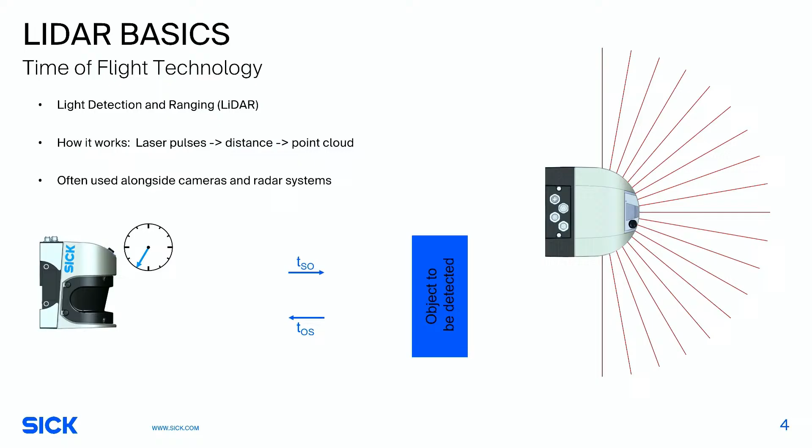So by combining all of these sensor systems together, again, if you can fuse all that data into one system, you often get the most reliable system overall. But LiDAR brings a lot to the table.

When you're talking about LiDAR sensors, there's usually kind of a trade-off between 2D versus 3D. 2D, just like on the slide I just showed, is just a single slice of the surroundings. So like we show here on the right, basically you have a single plane, and then if you have that plane mounted horizontally, you get a reading of everything that it can see in that level plane. If you mount it vertically, you're going to be more like an invisible wall, for example, so you get a vertical plane depending on how you orient that sensor.

3D LiDAR, on the other hand, usually adds some other functionality, whether it's a secondary mirror, a rotating hexagon mirror, or some prism effect, to basically get a 3D view of the surroundings. So multiple planes combined to get one 3D point cloud. Two different concepts, two different executions, but basically all based on that same LiDAR time of flight principle.

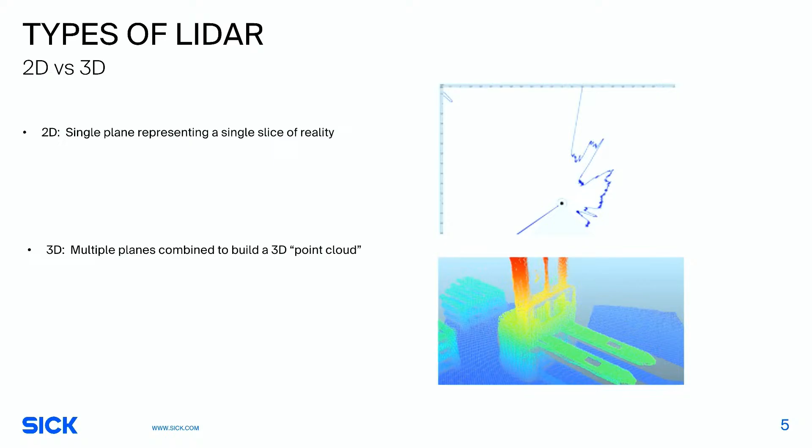And the types of applications you get into, having those two different types of technologies, can be pretty varied as well. Here I'm showing basically 5 different common 2D applications that I see for LiDAR when we're talking about an industrial environment. I think certainly one of the more popular ones that we see is on mobile vehicles. So if you've got a vehicle traveling through a facility, some of you may already be familiar with a safety portion where you've got a safety sensor on the front of a mobile vehicle, making sure that there's nobody standing in front of it.

LiDAR is often used in that safety application, but it's also used in less safety critical applications as well, where maybe the robot just needs to know if a fork truck has parked its forks over the path of travel, or there's cables or racking or something like that that may damage the robot or create downtime. So LiDAR is often used, as you can see on the left here, just kind of like a cow catcher on the front of the vehicle to verify that there's nothing in the path of travel.

Similarly, in a static application, we often see LiDAR being used with some combination of totes traveling down a conveyor. Here in this particular orientation, we're looking down into the tote to see if it's empty or full, see if there's anything laying in the bottom of that tote. I've also seen the same thing done where the LiDAR is mounted horizontally over the top of the tote, just basically looking for objects sticking up out of it before it travels onto the next process along the conveyor. Very common way to use LiDAR in logistics automation.

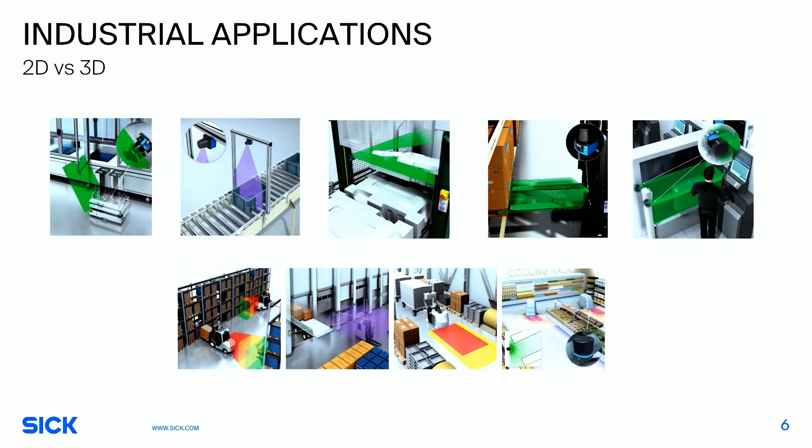But basically, in roughly the 2010s or 2020s, we started to see some changes that really got it to be as useful as possible. Like any open standard, as it becomes more and more adoptable into other field bus networks, we see more and more uptake of that open protocol.

So it's a very interesting concept in that from a sensor level, IO-Link doesn't require any additional connectors or wiring or anything like that. There's a very good chance, honestly, that you may already be using IO-Link sensors in your facility and not even be aware of it, because these are often just simple sensors. They don't have any Ethernet cable attached to them or anything like that, because IO-Link operates right over the standard connectors for that sensor. Usually over the power lines and the output lines. So it's just a standard 3-wire connector.

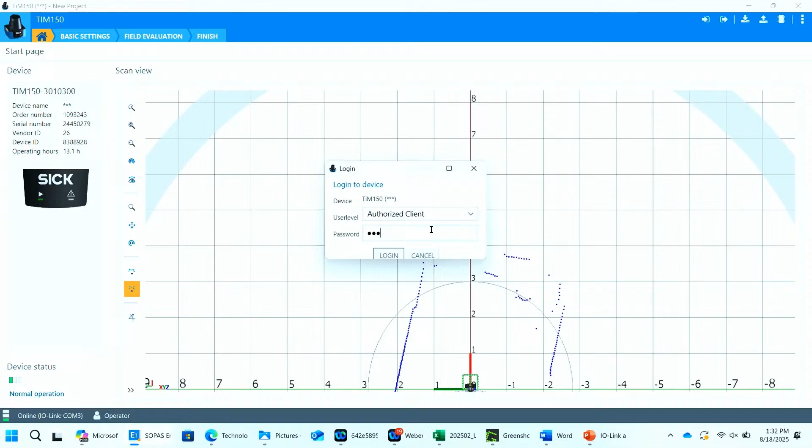When I'm in this interface, first thing I need to do is log in real quick, because we do actually start it off in a read-only mode. That's just to prevent anybody with a laptop from coming in and making unplanned changes to our configuration. So I'll log in, and now I can actually change what it can do.

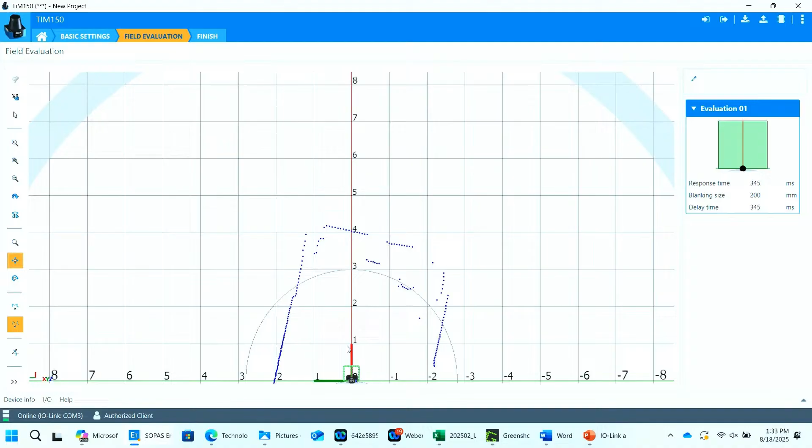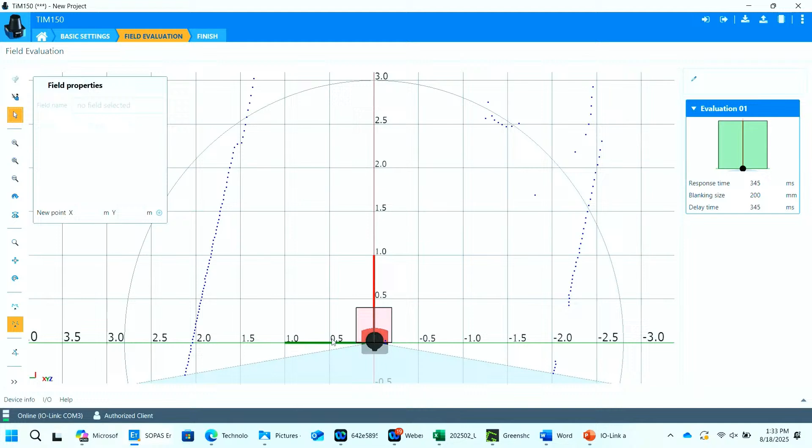If I come over here to this field evaluation tab, this is kind of where the magic happens. I'll zoom in just a bit more because we've got 2 default fields in here already, and they're pretty small. Now, if I want to modify those fields, it's not too hard. I can just click on one, and then these field points are how I modify the shape of that field.

Now, these fields can be basically set up to look like whatever I want. If I want to make it a hexagon or a large rectangle, I can do that, and they can overlap each other as well. So I can make a large field if I need to, or I can add more field points, and I can delete field points. I can make all kinds of changes in here to make that field look like whatever I want.

So if I'm looking over, say, a pallet, and I've got a standard size pallet and a Euro size pallet, I can have 2 different fields in here and not have to really adapt anything as I switch from one pallet to another. Whatever you want this shape to look like, we can make it look like.

If I need to make some changes to the way that it detects those objects, I can do that in here as well. Just as an example, I can set the response time so that an object has to be in that field for a certain amount of time before it actually triggers. By default, we've got it set to 345 milliseconds. I can speed that up or slow it down depending on the process I'm working with.

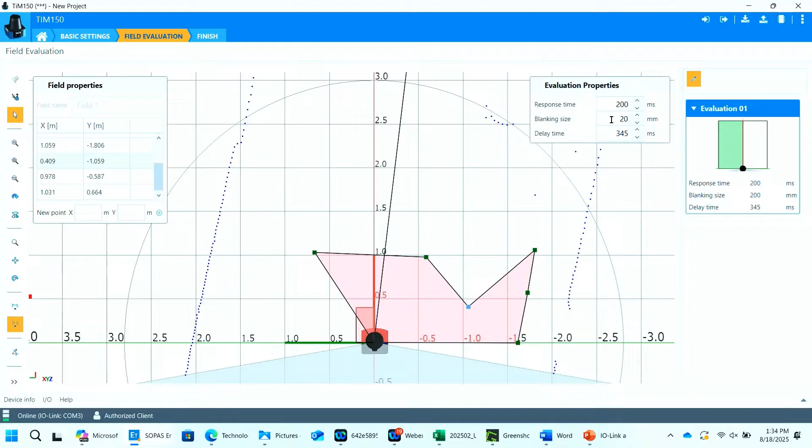We can also set what's called a blanking size. Blanking size is basically how big of an object needs to be present before it triggers the field. By default, it's set to 200 millimeters, approximately 8 inches or so. I can make that quite a bit smaller. So we've got this set to a response time of 200 milliseconds now, and we've got the blanking size set to 20 millimeters. I'm going to change that real quick just to get any noise out of the environment, because I think I've got something in my field of view.

But once I've got that set the way that we want it for the application, we can now see on the right there's a green field indicating that's clear, and if I put something in front of it, it turns yellow to indicate something is present. And that right there is what we mean when we say sensorized LiDAR. At this point, I can press download, I can walk away, and the sensor is now configured. It doesn't take any longer than what I just showed you here. Once you've got your parameters set correctly, it's good to go.

And that information is now sent out over IO-Link. So if you need to get that information into, say, your EtherNet/IP network, you pair that with a gateway and you're set. You've got a LiDAR sensor that brings all of the power of LiDAR onto a very simple open network called IO-Link. If we wanted to set the other field, we could do that as well, with other parameters or the same ones, depending on your application.

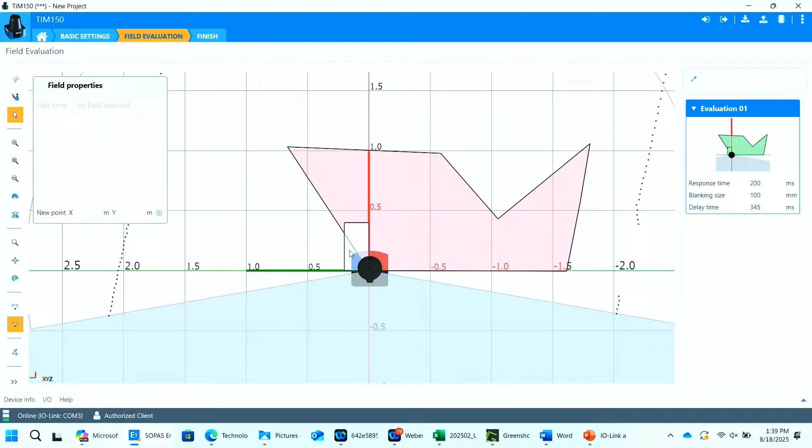So now that we've got the sensor set up the way that we wanted, I wanted to show you real quick one of the big features about IO-Link that makes it a really powerful tool for you. Thing to keep in mind is that things happen on a factory floor, sensors get damaged, things fail over time. So when something happens to your sensor, being able to replace it quickly can be a big benefit.

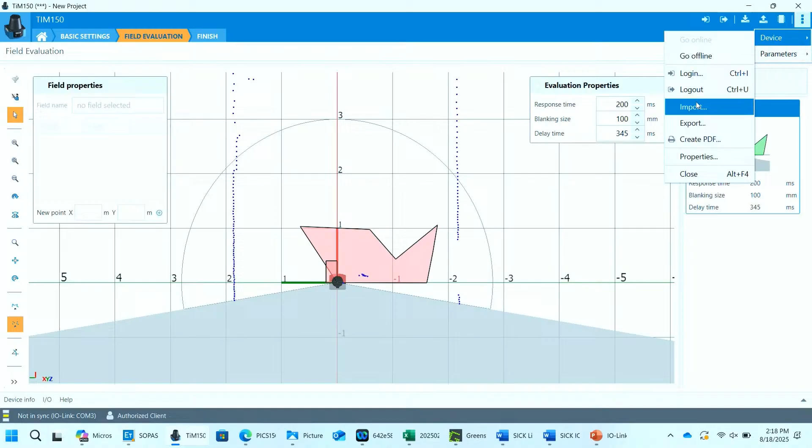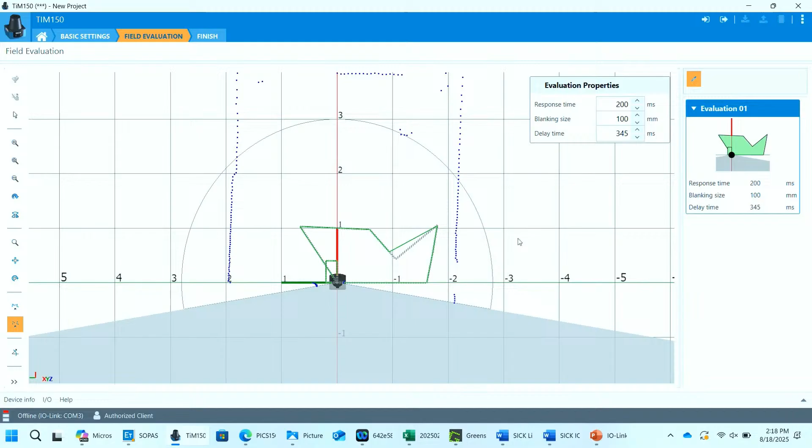The way that we've got it set right now, if this is our application, what we can do is we can take this information and share it with our desktop. So wherever we want to store this file, we can create a file on our computer, whether it's on a flash drive or on a server or just on your laptop. And you can put that on your desktop, and then if anything should happen to the sensor, we can clone it very quickly.

So just to show you what that looks like, if I come back here, I've got this sensor here, and you can see the serial number ends in 0279. If this sensor gets damaged, somebody comes along and clips it with a forklift and it gets smashed, I can pull one right out of the box, which I'm hooking up now, and I can connect to that sensor. I'll come in here, and you can see if I go online, this new sensor takes a few seconds to start up, but basically, if I read these parameters, you can see we're now on a new serial number, new configuration, clearly not the same one we had earlier.

If I need to clone that to look just like my other sensor, I can just import that file that I created earlier. So I come back here to the desktop, I double click on that file, and before too long, I'm back up and operational. We're right back to where we were. This is a clone of the original sensor. So I just wanted to show you that because you saw how quick and easy it is to get this thing back up and operational in under a minute. So that's one of the biggest features I think about IO-Link.

So getting back into the presentation real quick, I just wanted to share a little bit more about what we typically see when we talk about LiDAR in industrial automation. Looking at what I just showed you in SOPAS, you can see where that type of application could be performed on a conveyor, right? Because warehouses have miles and miles of conveyor, and oftentimes it's difficult to track if an object has fallen off that conveyor. So as you can see here on the left, we've got a conveyor application where if you mounted these sensors underneath the conveyor, you can get a very quick view of where an object has fallen off. Set up your zones to be a rectangle along the length of the conveyor.

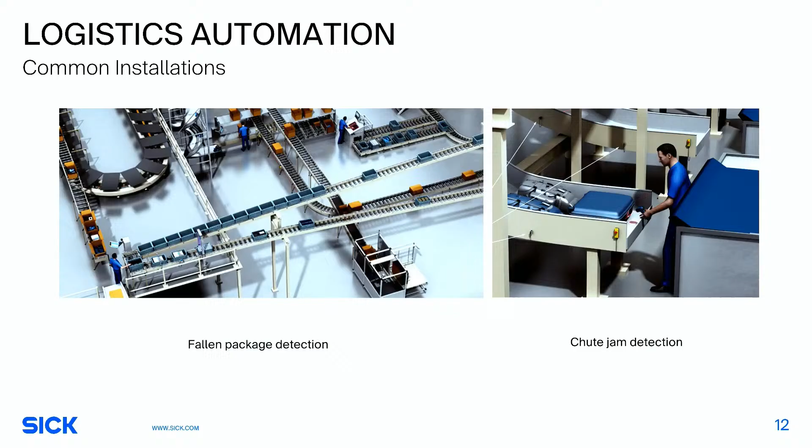Now, every system for the most part has some drawback when you're trying to install it, whether it's dealing with lighting or dealing with alignment. We've seen some things over the years that we've wanted to call out to make things easier to install when we're dealing with LiDAR and IO-Link. One of the big ones is just picking the right sensor for the job. What we're showing here is the TIM 150 that I'm working with today. And the TIM 150 is a great sensor. There are two different varieties available of it.

One's called the TIM 100 and one's called the TIM 150. And basically the only thing that changes between the two is the range. Where the TIM 150 has a range up to 10 meters, the TIM 100 has a range of up to 3 meters. So just basically picking the right sensor. If you've got a large amount of area to cover, you may want to go with the TIM 150. If you've got a smaller zone, maybe you just want to look over a pallet or something like that, that 3 meters may be enough for you. You can get away with the TIM 100.

Regardless, the TiM1xx series has a whole bunch of other things that we can cover. One of the most important is probably the ambient light immunity, where using our technology called HDDM+, we can filter out any kind of ambient light shifts that might happen within the facility.

Very high ambient light immunity, so if you happen to have a change in the lighting in the plant, or somebody opens up a garage door and you end up with more light than you expected, it's not going to trigger that sensor. It's also not going to get confused by, say, reflective vests, the high-vis vests. If those happen to be traveling by, it's not going to get triggered based off of those either.

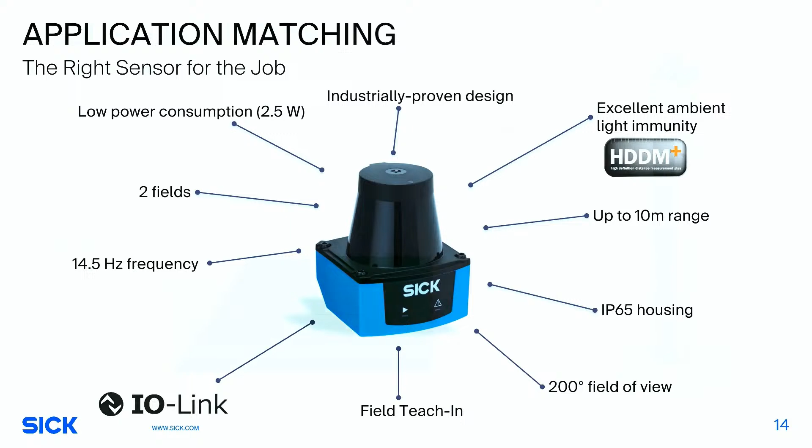So picking the right sensor for the job is a great place to start out when you're trying to get a reliable system with easy implementation. The other thing to consider is that we've got two other tools to make things easier when you're trying to get these installed as well.

On the right, this is a tool called the Alignment Aid, which solves one of the bigger issues with LiDAR, which is that you can't see the plane. It is an infrared plane, infrared lasers, and so if you're trying to align it, it can be a little tricky, especially over the 10 meters that the TiM can see. So we've designed a product called the Alignment Aid tool, which if we switch to a top-down view, I can show you real briefly how that works.

Basically, this alignment aid is developed by SICK and manufactured by SICK, and it's got a series of infrared detectors running the length of the tool. And if I present it with infrared light here, you can see we've got red LEDs that light up wherever the plane is. So by getting one or two of these and putting them into your facility when you're trying to install it, it makes it a whole lot easier to figure out where that plane is. So just a little trick that we've developed to make this a little bit easier.

Switching back to the presentation, the field teach-in is another tool that we can use to make things simpler. I showed you how quick and easy it is to create a field. Depending on the shape, it's really not a complicated process. But we do also have a function called teach-in, where basically in the SOPAS software, we can set up the ability to, by clicking a button, learn the environment.

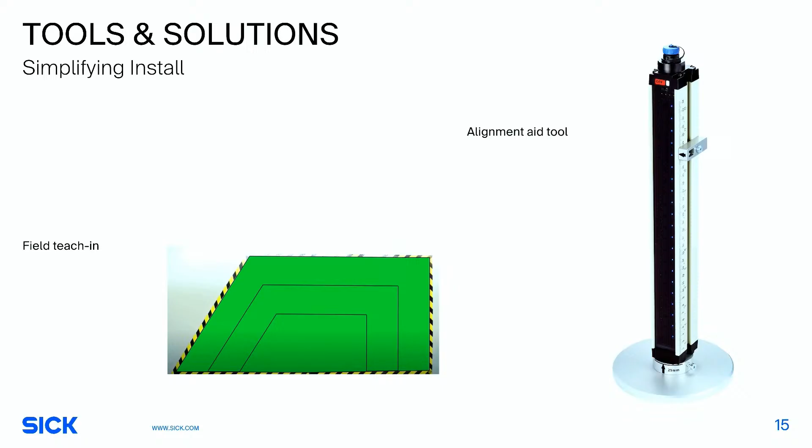Again, by combining the power of LiDAR into a simple sensor and then adding IO-Link to make it easy to network, easy to diagnose and easy to configure, we find that the time is right for this smart sensing solution. Thank you very much.